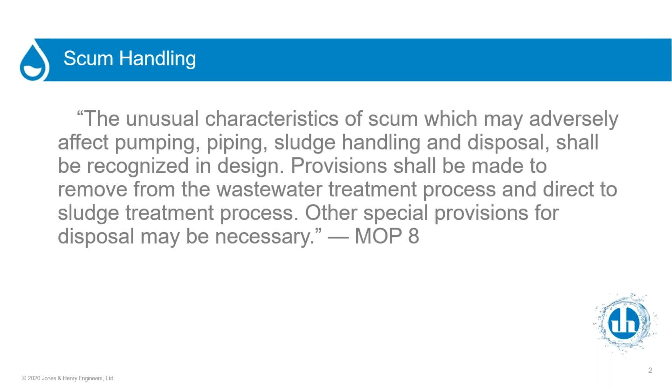So scum removal and management, why is it important? First of all, if you get a lot of it at your treatment plant, you're going to increase your organic loads going to your activated sludge system, so you have to account for those loads. Now, when I talk about increasing your organic loads, I'm usually talking about a location that has a food industry or some large scum and grease loads that will make it to the wastewater plant in order to increase your organic load.

Operational issues, odors - they increase the odors around the plant, especially in the locations where you're accumulating the scum and the grease and whatnot. So I'll call them kind of localized odors - manholes that you may be using as a scum pit or channels at the wastewater treatment plant on your primary tanks. So from an overall standpoint, there are odors being generated and they're just adding to the overall odors at the plant. Visual blight - when we talk about a wastewater plant, how critical is it or how important is it?

I really look at operators, and you guys take care of your plants very well, you like to keep them clean. This is your place to work and where you spend the majority of your time and day. So having grease balls floating around the primary tanks or inside the channels, it's just not very appealing to look at, and you don't want it to occur, or you want to get rid of them.

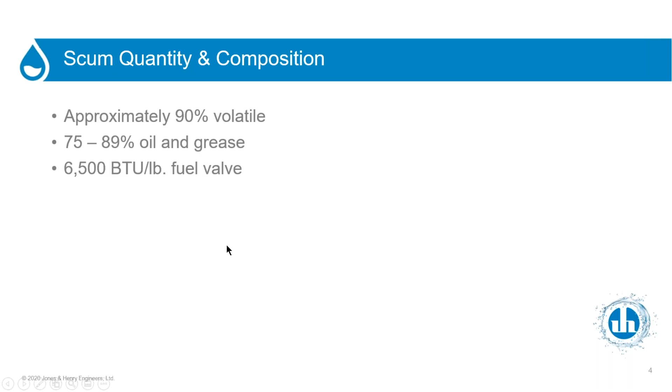We talked a little bit about quantity, again based on your industrial recycle streams at your wastewater treatment plant, and how much flow you're recycling. We tend to sometimes just pass scum around the wastewater treatment plant, sort of wanting to make it just go away. If we ignore it, it'll go away. And if we spin it around enough, keep sending it around to the headworks, eventually it'll get rid of itself - and that's just not the case.

How effective are your removal systems? When it comes to your primary tanks, your final tanks, if you have a skimmings tank of some sort, that's kind of what gets missed in the process.

The collection system can deliver big slug loads from certain areas. A lot of those slug loads typically don't make it to the wastewater treatment plant. A lot of them end up at your intermediate pump stations within the system, because that's the first place the scum, greases and oils have a chance to accumulate and float on top and not be able to get out of that pump station.

Collection systems - everybody's putting in a grease trap nowadays, and I think communities have gotten a lot better at checking grease traps. I think back in the day we were a little more lax at checking grease traps and making sure restaurants and places are cleaning out their grease traps and taking care of those. And then again, septage receiving, we kind of talked about a little bit in the last slide.

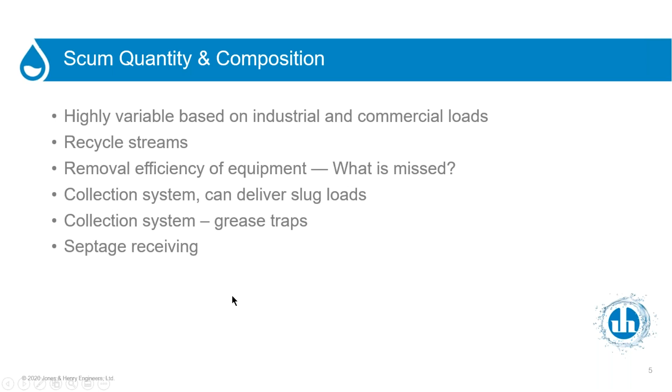The question always comes up: is this a large or small plant process as far as scum removal or separate scum removal? I'd say any plant over 10 MGD in size should certainly be looking at some form of separate scum removal, like a skimmings tank ahead of your primaries, to remove scum, greases, and oils.

As you go into medium-sized plants, say 5 MGD, you have to start asking questions. Do I want to take septage, or a lot of septage? Some plants simply don't want to take septage, so that's not a question for them. And do I have a lot of industries in town, food processors especially, that are going to give me a higher level of fats, oils, and greases? Am I willing to accept those industries?

Normal sewer permits, I think the typical number is around 100 milligrams per liter on your FOG. If I have an industry that wants to discharge 250, am I willing to take that food processor into my plant? For smaller plants, it depends a lot.

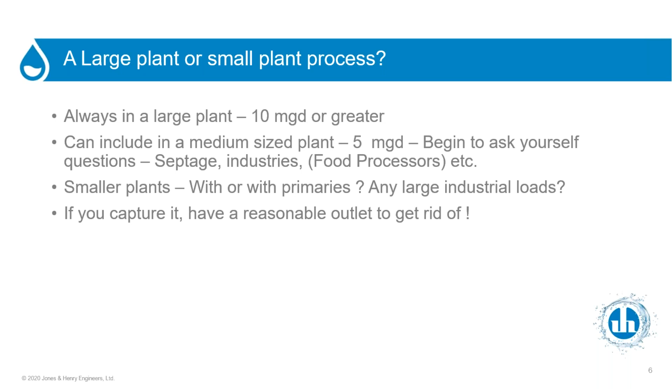One thing to always remember is that if you're going to capture it, no matter where you capture it within your scheme, you have to have a reasonable outlet to get rid of it. So once I capture it, what am I going to do with it? No matter what size plant - 10 MGD, 5, or even smaller - okay, I'm going to capture it, I know I have a problem. So now how am I going to get rid of it?

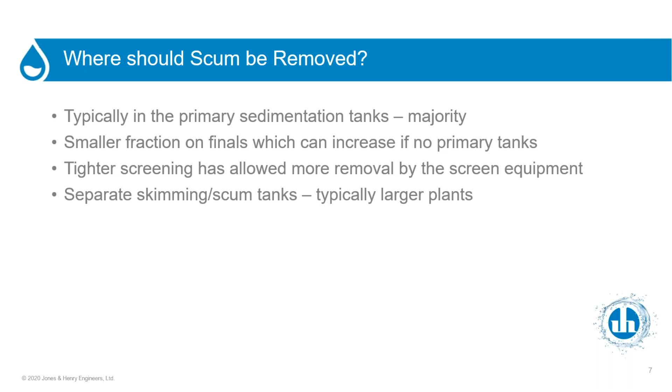The problem becomes: where is scum actually removed? And I think most of you operators out there are aware of this - it ends up at dead-end channels, especially in your primaries and your aeration channels. Some of that is avoidable, some of it's not.

As engineers, we tend to plan for the future. We want to plan for the future, so we kind of extend our channel sometimes a little past the last opening into a tank, so that we can connect onto it in the future and make building in the future a little easier. We can prevent some of that scum buildup by maybe putting in a false wall at that last opening going into a tank, so that everything coming into your channel goes into your tank.

That's really our goal, and I'll show you another slide in the future. The other place scum tends to accumulate is in influent and drain pump stations, or out in your system. You can see here, looking down on a pump station, all the scum, grease, and oils that have accumulated. Normally what happens, if it accumulates in a channel or drain pump station, you bring out the vac truck and vac it out.

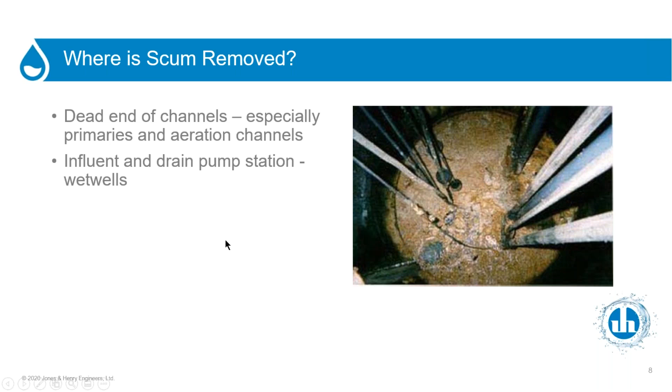So here comes the poll question. I'll let Sarah do this, but what's the chief component of scum? Solids, rags, oils and grease, none of the above, or all of the above. So let's sit here and wait a little bit for your results.

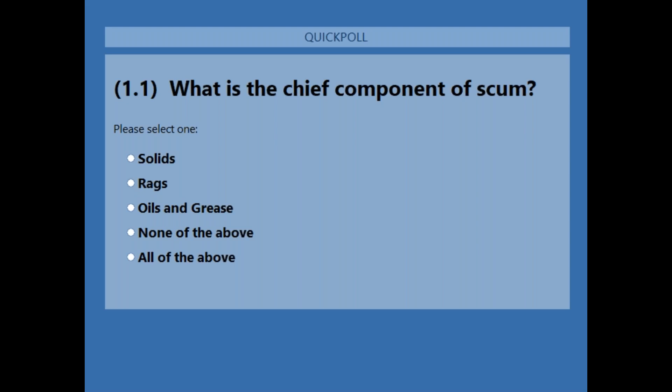Okay, we have about 70 to 75% voted now, with about 10 seconds left. Okay, go ahead and close it. All right, it looks like 79% of people said oils and grease, and 21% said all of the above.

So I would say we're in the right spot. I would accept either answer, either C or E. It's kind of a trick question, because you're going to have solids and rags in there too. So both answers are good.

So we'll keep moving along. Obviously, the trick side of the question was that you guys have dealt with it before, so you know that solids and rags and everything seem to come in with the septage loads, or along with your greases and oils.

So let's start talking about scum removal mechanisms. In primary tanks, if you have rectangular primary tanks, normally you have a full-length skimming tipping trough down at the end of the tank. It can be manual, or most of them I see are manual. I have seen automated ones, normally in larger plants where they have many primary tanks. But the manual ones work just as well as the automated ones. You roll the trough down to take in the scum, greases, and oils on top of the tank, and it either goes by gravity to a pump station somewhere, or sometimes it's directly pumped off of each tank.

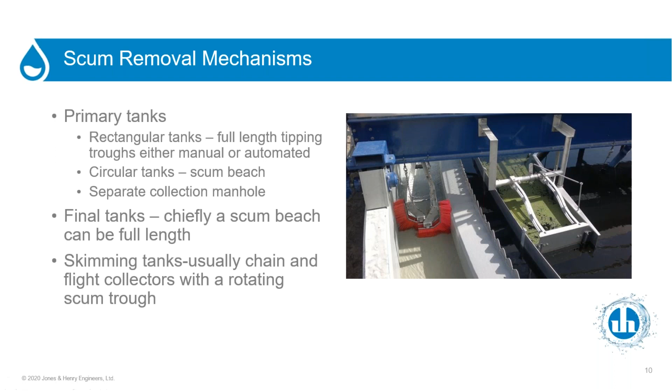Scum beach and troughs - when we talk about them, here's a full-length trough.

Typically, and you can see this one, it's kind of an odd looking picture off to the side, but you can see the walkway that's next to it. Really, you should have access to that scum trough or scum beach from the walkway.

So you can flush it out and hose it off. It's important to have a yard hydrant near your clarifier or primary tank so you can flush it out. In fact, you can see in this particular one some of the scum blocking the openings into that trough. All the trough systems have some form of automatic flushing valves on them, and I would say they all fail.

So no matter what kind of toilet valve you have on the end of your flushing trough, sooner or later it's going to plug, get something in it, and leave itself open, so you're always flushing water into your trough and putting more water into your plant drainage system. On final clarifiers, they always seem to grow a little algae, which eventually holds them open, so they'll be flushing constantly as well. That's why I said put a valve on the discharge, or on the pipe off the scum beach, so you can get in there and fix them, because you're going to have to clean them off every once in a while.

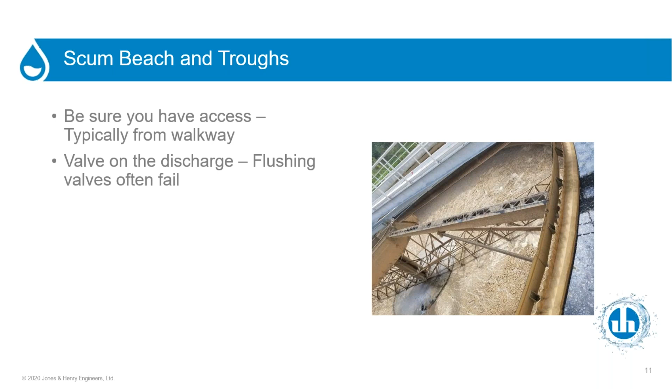So now we've captured it, and we need to pump this stuff to our scum treatment or whatever form of treatment we're using. Most often I see a chopper pump used. There are a lot of chopper pump manufacturers, but typically the word chopper pump is associated with a Vaughan chopper pump. It's got a little chopper nozzle or chopper blade on the front, and an impeller, and they work really well. They'll chop up the materials in there, because like you guys said in the poll question, you do get other things in there, solids, plastics, and rags. So chopping them up and moving them along is important.

Recessed impeller pumps, and Wemco is a traditional trade name you see, though there are various manufacturers. The idea of a recessed impeller pump is it has a big free passage of solids, shown in green in the middle of the page, with the impeller outside the flow path, just generating energy to move the solids through the casing and out of the pump.

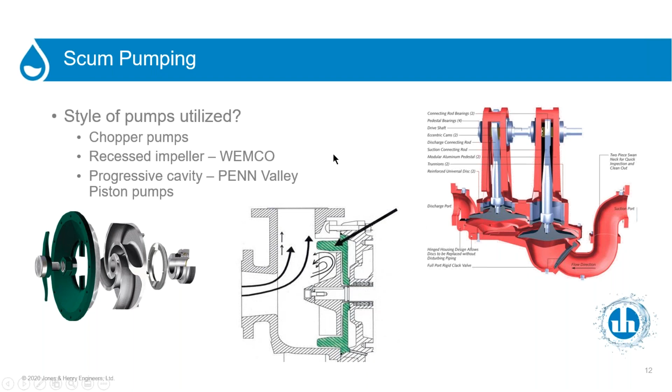As far as our scum transportation lines, now we're pumping it, now we got to move it. If you're moving it by gravity, be sure to slope the bottom of a tank or the manhole to make sure we're moving it through, putting a nice slope on that manhole with benches in there so we can move it right on through.

When we're talking about wet wells and pumping, you could consider mixing the contents, and I'll talk a bit later on how Lima mixes their contents within their scum wells. The reason is to homogenize the material. If you can get it homogenized, you have a better chance of bringing your level down lower in the pump station and getting those materials out. People will lower the bottom float and try to suck that thing all the way out, but it's really hard to do that when you have a lot of grease and scum on top. But if it's all mixed up, you've got a much better chance of lowering that bottom float on a submersible station and sucking that stuff out when you're throwing some water in that station.

In extreme cases, you might flush connections or pig stations. It might be more of an industrial process where they're handling a lot of greases and oils, so they put a separate pig in to pig out the lines they're using for transport.

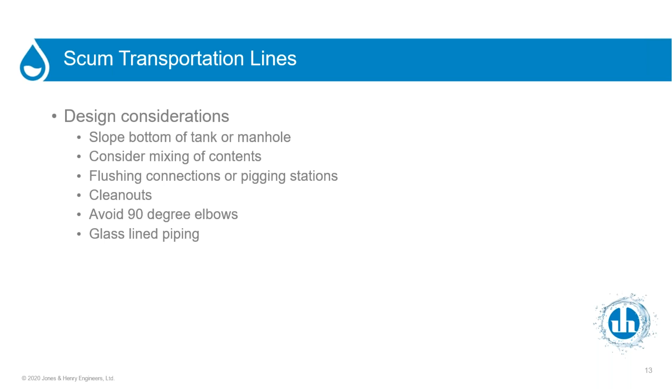So as we talk about channels, we talked a little earlier about how they accumulate in those dead end corners. So, no dead end corners - make that last opening of the tank flow into your particular primary tank, usually where we see those dead end corners.

One really important thing that sometimes gets overlooked: on the tank openings, we always put a slide gate there to be able to close off the tank openings. Sometimes we just don't get that slide gate up far enough to allow the opening to be free and clear. And if you don't allow that opening to be free and clear, then that grease and oil and scum that's supposed to be taken out in the primary tanks never makes it into the primary tanks.

It's just sitting in that channel ahead of the primaries and accumulating - that's all it does. And you guys come out and suck that channel out every 3 months, maybe 6, or yearly, with your Vactor truck. But if that gate would go all the way to the top, it would go to your removal mechanism in the tank and allow that removal mechanism to take out the scum.

Fillets in the corners - so if you have some corners, you don't get stuff accumulating in them. That's where grease balls like to form, and they just kind of spin around forever in the corner, growing and growing.

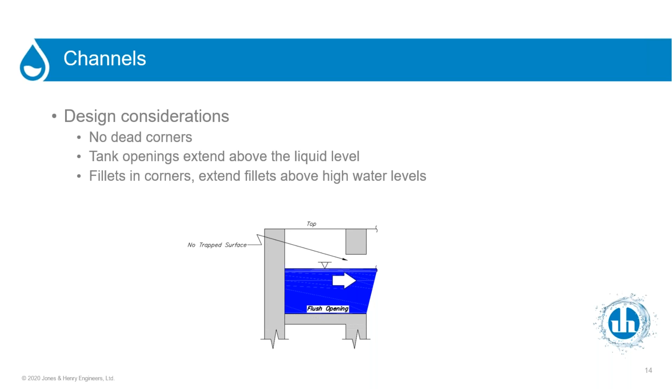Fillets in those corners keep the liquid moving, and then extend them above the high water level. Sometimes we don't get them up high enough and stuff will just accumulate on top of the fillet. But if we get it high enough, usually to the top of the tank wall, nothing will accumulate on top of that fillet. So just a couple ways to think about design considerations on channels.

We're going to move now into scum treatment - what do we do now? We talked about it, we've captured it, and now we've got to treat scum. We've got to do something with it now that we've captured it, because if you're going to catch it, you want to do something with it.

So this is a real simple concentrator tank. They can either be stainless steel or carbon steel - either way works, but we've gone a lot to stainless steel these days, so that would probably be my choice.

There's an option in these style of skimming tanks for a variable skimmer timer and adjustable overflow weirs. That mechanism that's kind of going around in the tank to skim the grease and oil off the top - you can variable speed drive it depending on the loads that you have.

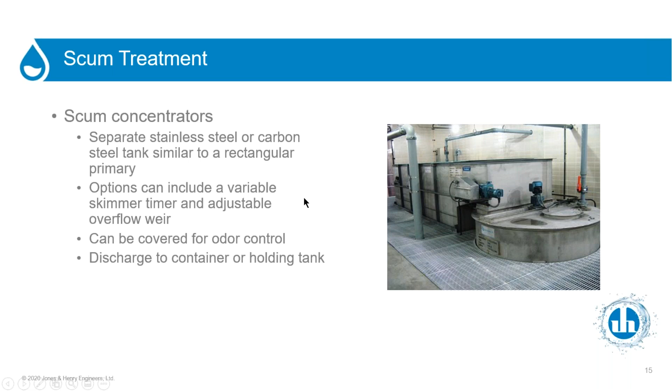Normally, a lot of times they're getting to be covered nowadays, or at least have covers with hinges on them so you can see what's going on inside the tank. They often discharge directly into a container, or sometimes they discharge into another smaller tank, like this particular one. You can see that smaller tank has a mixer on it, which tries to homogenize the grease, oil, and scum as well.

So that's this heated batch tank. I don't know how well you can see the photo, but if you look in the upper left-hand part, you can kind of see a skimmings tank discharging into this homogenized batch tank. There's a mixer on top, and this tank has a heated jacket.

What we're trying to do is keep everything fluidized well, heat it so it can further reduce and homogenize itself, put a mixer in there so you can get it all mixed up, and then pump it to where you need to, either an incinerator or anaerobic digester.

The heat on the jacket can come from your incinerator or your anaerobic digester. So you have a low temperature jacket on there just to keep everything homogenized and nice and liquid.

You've pulled it off now with the skimmings tank, and now you can send it to your digester. The digestion or breakdown process has already started, so normally you don't have those bad effects of sending a big slug load of material to a digester, and you can get that heating value from the scum for your CHP process if you happen to have one at your wastewater plant.

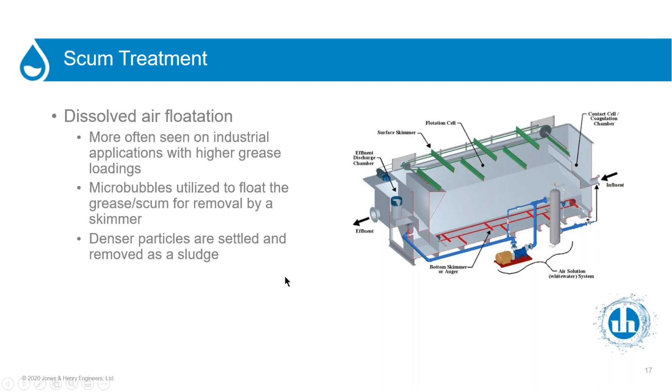You also get some denser particles that are going to settle down at the bottom, so you'll have a bottom skimmer and some way to remove the sludge from the bottom of the tank. Here they'd call that the underflow, and you'd have an overflow at the top to take care of your greases and oils as well.

I've seen this at a few plants, mostly smaller plants. They seem to work fairly well. It's called a scum screen.

They're externally fed, normally pretty small, with a tight weave on these screens, and they can discharge the scum straight into a dumpster like you see here. I want to say that's a picture of Englewood, Dayton, Ohio, but I'm not absolutely certain.

They have a spray wash to help the scum screen prevent clogging. They work fairly well, the ones I've seen and talked to people at smaller plants about, and I don't hear a lot of complaints. But on the other hand, I don't see a lot of them in service either, so probably where they work well, the operators really like them.

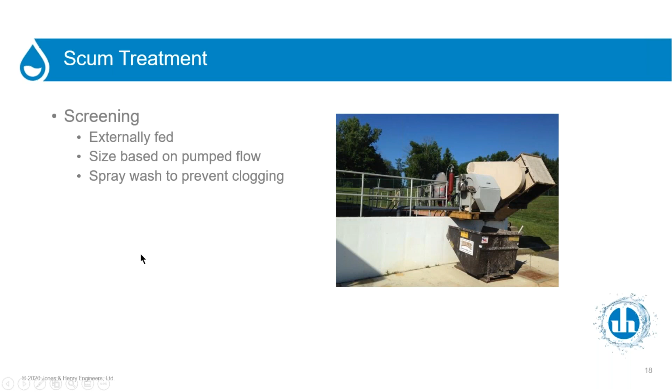So here's a little quick video of that scum screen. You can see it's a really tight wedge wire mesh.

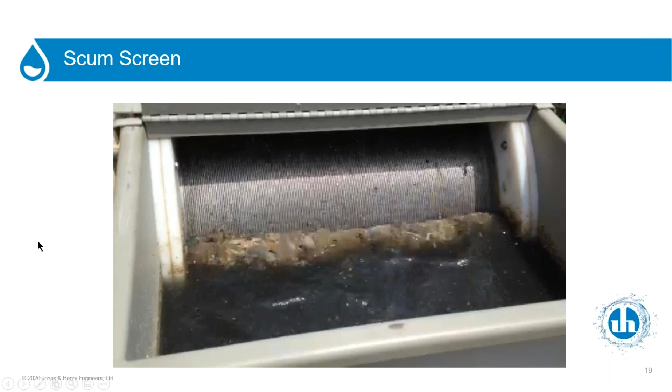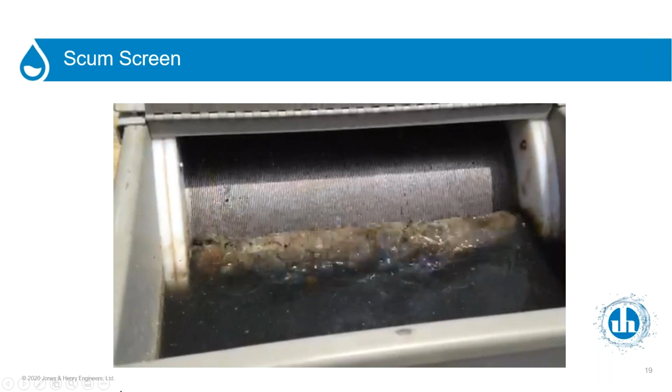One more time through the video. On the scum screen, that material will collect and normally just push out over the top of a weir or get knocked off with a wiping blade.

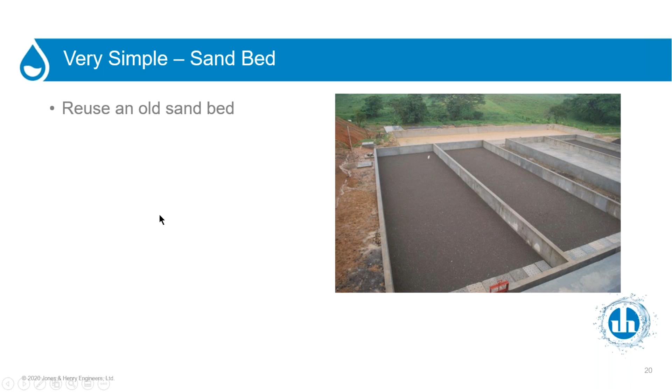If you take your scum line and dump it directly to your sand drying bed, it gives a place for the scum to drain. This one's got a picture of simply just sludge on it, but they work really well. They give a chance for it to drain out, and then you just come scoop it up with your Bobcat, throw it in the dumpster, and take it to the landfill. So it's usually pretty simple, but it works well.

Here's poll question number 2. Which of the following forms is not a form of scum treatment? A screen, DAF, a belt press, or a concentrator? I'll let you guys answer the poll question here.

And Dan, while we're waiting for folks to answer that question, I've got a couple questions here for you. The first is, are there items that you should avoid when handling scum?

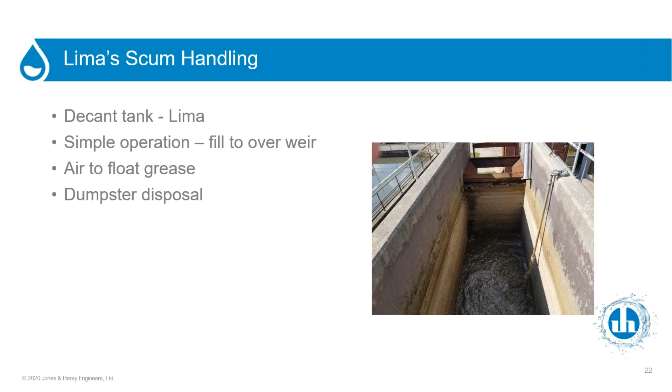Each, I believe, two tanks feed one of two separate wet wells, which has two Hayward Gordon chopper pumps in this dry well configuration. Could be just about anybody's pumps, but a couple of things I like here in this particular layout: you can see it has a very short suction line, so that since you're pumping greases, oils, and scum, you don't want those lines to build up or be very long. It makes it easy on the system. There's a valve right there and a water feed line, so we can easily flush or back-flush that suction line out in case it gets plugged.

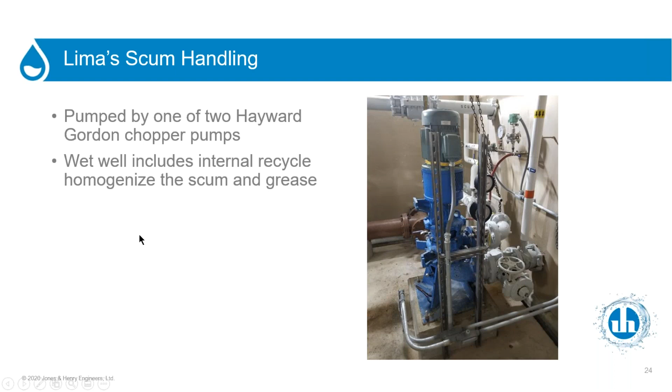This particular well does have a homogenizing system to try to homogenize the scum and grease within the wet well. And if you're familiar with Flygt pumps, they started this system that has a nozzle that allows the discharge so that the pump suction is here.

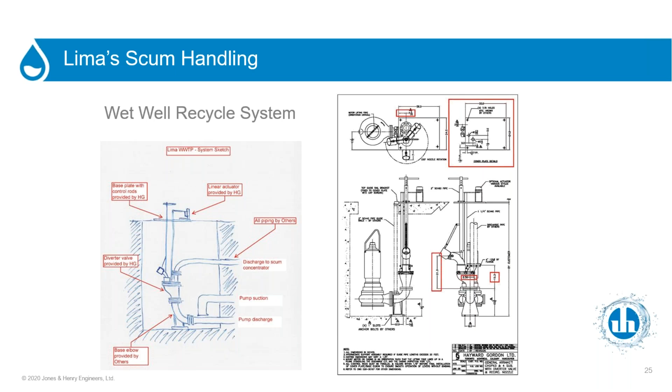I don't know if you can see my mouse or not. We have the pump discharge, and a nozzle linear actuator up here that changes position to mix up the materials within the well, homogenizing them while you're pumping it down, giving you a chance to get the well completely cleaned out. It's a pretty simple system, and it is manual. That was a selection versus trying to put some kind of mixer in there instead, or using air to mix it up, but air quite often just gets everything to float to the top. So this system was put in to try to mix it up so we could pump it out.

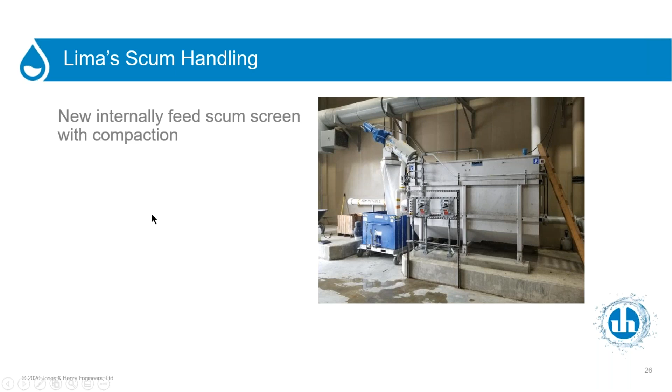So those pumps feed a new internally fed scum screen in a tank. It's 12:56, so I'll try to keep it moving along here. It has a compactor on the end there, and you can see the bag—anything this scum screen takes out goes into the baggie. That way you can keep the odors, flies, and vermin away from the scum. That internally fed scum screen is basically a basket screen, like a lot of you at little plants already have, that's put into a tank. So what are some of the design details there?

It's all 304 stainless steel construction—a tank-mounted screen, shafted screw on a 35-degree incline. It has a very tight wedge wire, 0.5 millimeter, and a pretty significant spraying system. Obviously, when you're handling greases, oils, and scum, you want to be able to spray that screen off so you don't get plugging. It has a closed discharge chute and a bagging attachment, plus a booster pump included to get you high pressure.

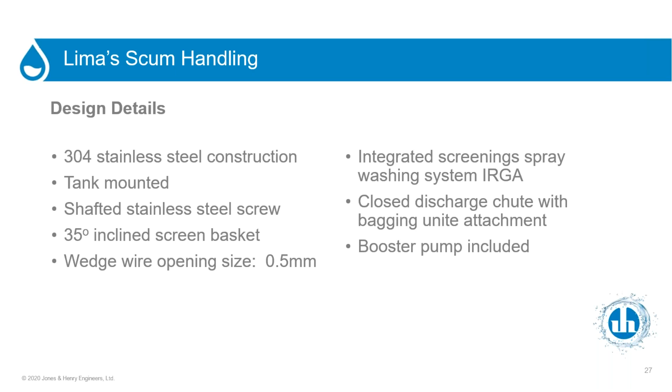One thing about the bagging attachment—normally on a standard wastewater screen, same type of screen, I get crazy about the bagging attachments because sometimes you can't see what's in the bag, and when you try to move it around the dumpster, you could get cut or poked by something inside. Here, on a more specific system for scum, I can see it being an advantage for keeping down odors and everything else. So there it is.

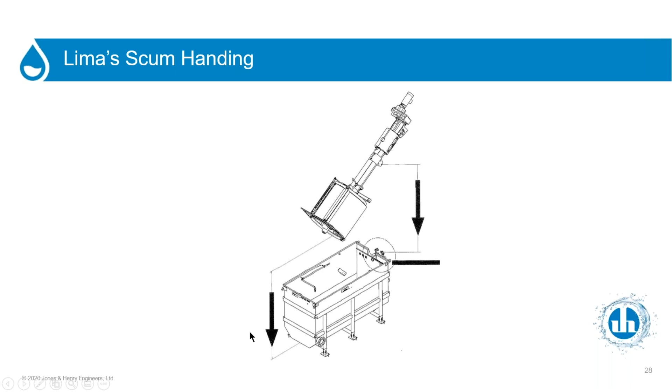There's your simple basket screen that's put into the tank. We pump into the tank and collect the scum, grease, and oils, pushing it up the transport screw into the compaction zone, along with any other materials that happen to be in there. Again, there are three high pressure washing systems on this machine with a booster pump as well—I believe it boosts up to about 100 or 120 PSI. A normal basket screen might only see 60 PSI, which is probably adequate for a normal wastewater basket screen. But here, when we're talking scum, greases, and oils, we wash it with much higher pressure.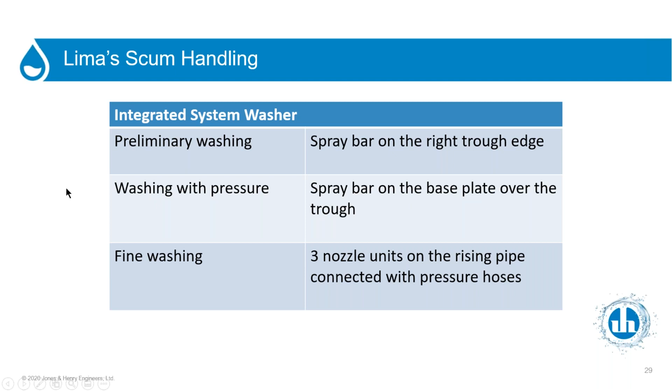So finally, poll question 3, before we talk a little about how Lima's doing. What's the most critical consideration when handling scum? That it floats and settles, that it'll stick to anything, that it will contain plastics and foreign materials, or all of the above.

Okay, Dan, I think we've got time for another question. Is it possible to have no scum handling facilities? Sure, it's possible—if you don't have any primary tanks. Like I said earlier, we do a lot of treatment plants now without primary tanks. So with aerobic digestion, you'll go straight through a screen, and the screen will pick up some of your scum straight into an orbital or oxidation ditch, or even an SBR, and then off to final clarifiers that only have a scum beach. Quite frankly, we'll chase that right back to the head of the plant and hope it comes out. Does it come out? Some does. Does it want to accumulate somewhere? It might—you'll just end up finding where it accumulates.

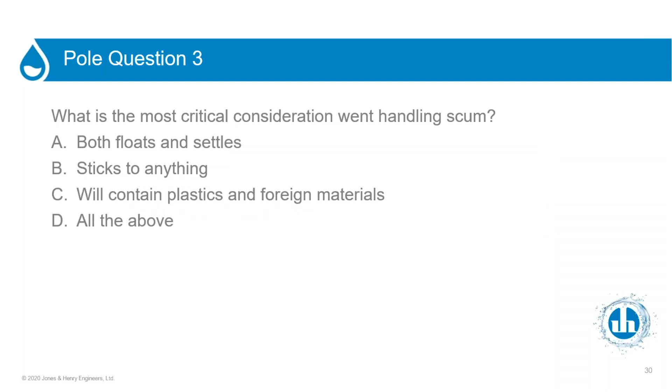So I can see I'm getting close to the end of my time here. So how's Lima doing? That's always the question. You go through a design and you want to know how it works.

They had to relocate the sonic level detector within the unit. It was underneath the cover, and due to all that high pressure washing, it was taking its toll - getting splashed on and material was getting stuck to it. So they were having to open it up and clean it. What they've done is cut a hole in the top and moved the sonic level detector so they can get at it more easily, putting it above the cover, or right at the level of the cover.

Something we talked about before, they've had it plugged from certain food waste and grease. Where they've taken in a load full of a lot of grease and oils, it has plugged it. You've got to be careful of your loads. Sometimes you should have a mix, but when you take a load full of really bad stuff, bad things can happen.

If you've ever worked - I worked in a restaurant a long time ago, and it had grease fryers. Somebody left the nozzle at the bottom of the fryer open one time, so when the grease melted, it ended up on the floor. There's not a whole lot you can do about it right away, other than wait till it congeals and clean it up with a spatula. So cleanup is difficult when you get big loads of grease anywhere.

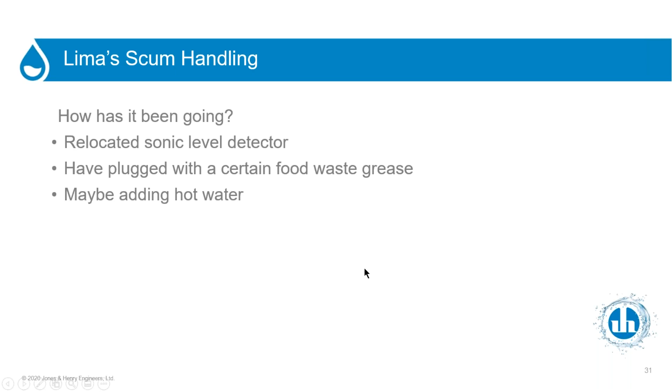It was talked about, and maybe they were only going to do it in one of the spray bars. So other than that one-time plugging up, and the moving of the level detector, it's worked really well. So with that, I'll open it up to questions.

Okay, thanks Dan. A couple of questions here. So over time, has the need for scum handling become greater or lesser at wastewater treatment plants? That's a good question. It's kind of dependent upon the neighborhood, so to speak. A lot of departments have told me if I have a neighborhood with a lot of apartments, the scum and grease loads can be more, and when I have more homes, it could be less. But in general nowadays we stuff everything down the garbage disposal, including whatever grease has done. So I would say probably it might be a little less because we don't like to use greases and oils as much anymore. But on the other hand, everything goes down the garbage disposal - my mom used to collect the grease in a can and throw it away, and I don't think a lot of people do that very often. So we'll call it: it hasn't gone up and down.

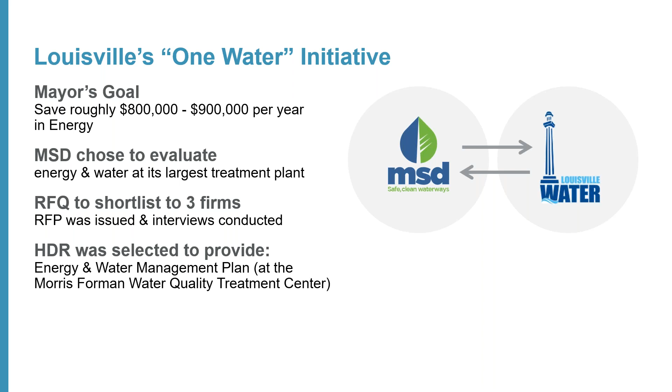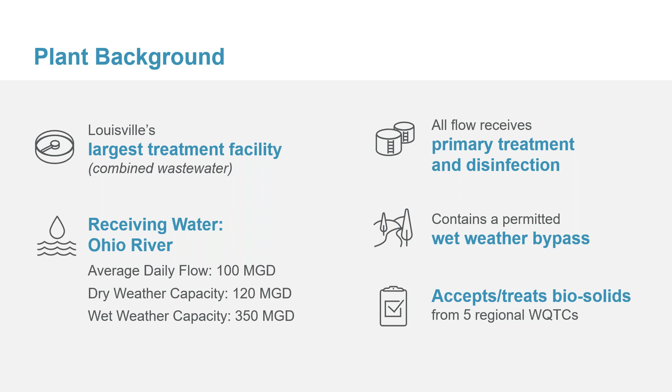It sits right on the Ohio River. A little bit of background on it: as I mentioned, it's Louisville's largest facility, and it treats combined flows. Average daily flow is 100 MGD, dry weather capacity is 120, and under very high flow conditions, wet weather capacity is 350. They basically treat all flow with primary and disinfection at 350, and up to about 250 on the biological side. They have a permitted wet weather bypass, and they actually accept and treat biosolids from 5 other regional facilities that MSD owns and operates.

Their liquid stream process is pretty typical, except for 2 things. They had biofilters, which they decided to keep in place when they added a high purity oxygen system as part of one of their expansions, perhaps 20-25 years or so ago. So they really have 2 different types of biological treatment, and we're going to talk about that a little bit more as we move through the presentation. And because they're on the river, there are times when the river stage is up when they have to pump their final effluent.

On the solid stream side, the previous presenter talked about dissolved air flotation. They have DAFs, they have anaerobic digesters. At the time of the study they had centrifuges, drum dryers, thermal oxidizers, and they produced a product called Louisville Green, a fertilizer blend similar to Milorganite. Since this project was completed, MSD decided to move forward with a thermal hydrolysis process, Cambi being one of the manufacturers, and remove the digesters and dryers.

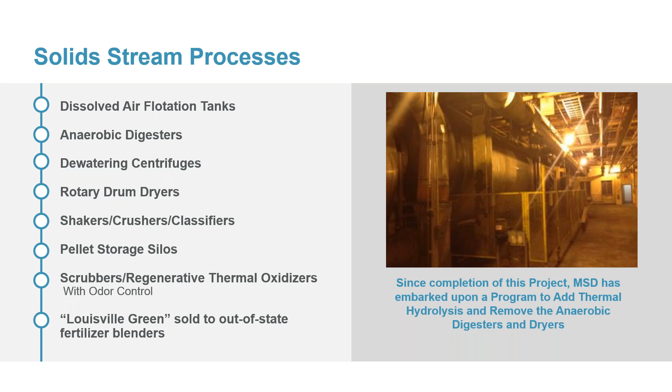So we're going to do our first polling question right now: what was the primary driver for Louisville MSD's embarking on a water and energy management study? Was it to make the utility more resilient, to comply with the mayor's initiative, because they had some money left over and it seemed like a good idea at the time, or because it was something the plant staff wanted to try?

While we're having participants answer, I have a question for you, Rich. Are these energy and water management plans scalable for different size facilities? They very much are, and fit for purpose. I've seen some utilities spend a few hundred thousand dollars to do a very detailed study with concept designs of the recommendations. We've also done these for utilities who want to spend less than $100,000 and get a prioritized list of things to do, then develop them themselves or put out separate projects to implement them. So yes, they are very much scalable.

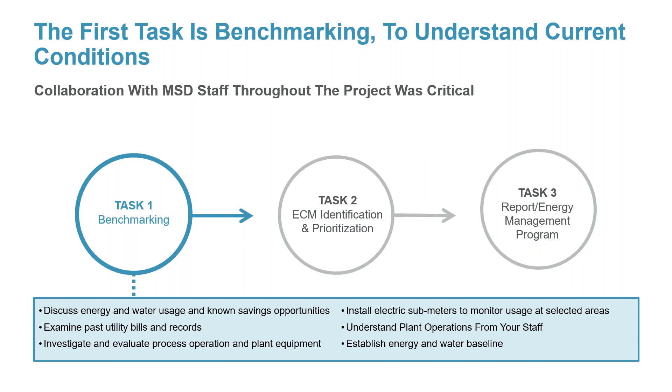This is from the WEF Energy Conservation in Water and Wastewater Manual of Practice number 32, for a typical advanced wastewater treatment plant. It shows that aeration consumes about 54% of the energy, which is pretty common—aeration has big blowers and big motors. In their typical plant, they had aerobic digestion.

That was another use as well, in wastewater pumping. So I provide this just for your information.

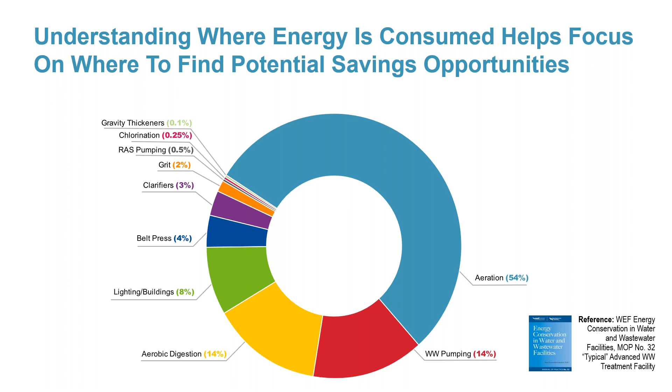Really, what we did was we developed one of those for this plant, and that's typically what we will do, is to be able to look at where energy is used and water is consumed at the facilities that we're evaluating.

So when we started this, and this study was done in 2013, 2014, basically they consumed about 75 million kilowatt hours per year. Their electrical bill was about $4.7 million a year. Natural gas was about $1.5 million a year. Potable water was about 660,000 a year. So this was really the starting point here.

And yeah, even though Louisville Water and MSD are both city enterprises, MSD does have to pay a water bill to Louisville Water. So their total electrical, water, and gas cost was about $6.8 million a year.

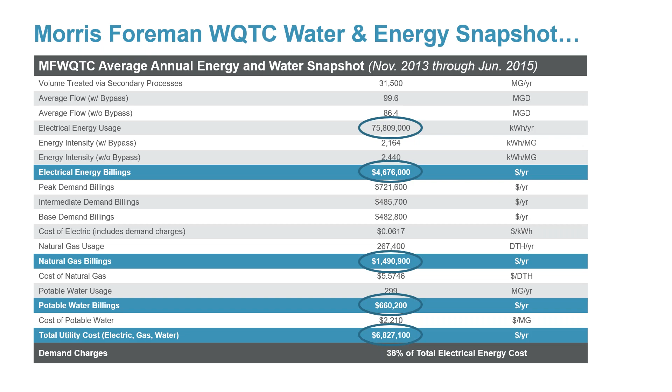One of the things that we typically do is develop a chart such as this, and what this chart basically shows across the top in the columns is month per year, and then down the rows is hours per day. And as we know, electric utilities have variable charges depending on time of day and season of the year. So we developed this one for Louisville MSD, and you can see here there was not a lot of variability in their case. It ranged from about 4.2 up to 5.75 cents a kilowatt hour.

Whereas for other utilities, this is a tool in the toolbox to say, can we defer operation of something? For example, can we defer washing filters until night as opposed to during the middle of the day on a hot summer day? Doesn't make a whole lot of difference here.

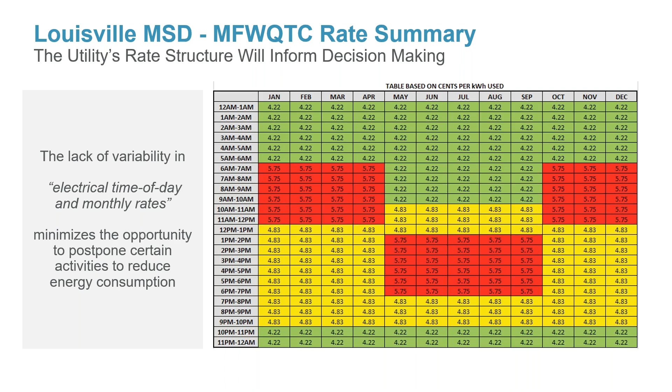Just by comparison, I led an energy audit for the city of Atlanta about 15 years ago now, and you can see here that there was great variability, from anywhere from about 3.5 cents a kilowatt hour up to 16 cents a kilowatt hour in the middle of the day on a hot August. So here it did make sense to take a look at deferring things.

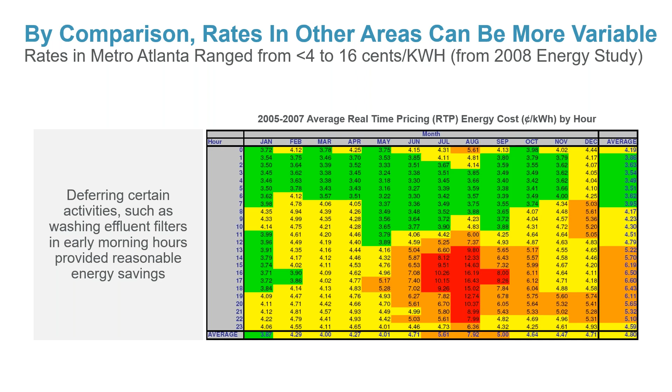For example, they have total nitrogen limits, and by doing nothing more than reprogramming their PLCs to wash their filters in the early morning hours as opposed to during the day, they would save about $50,000 a year. So anyway, that's an important thing to take a look at for any one of these audits.

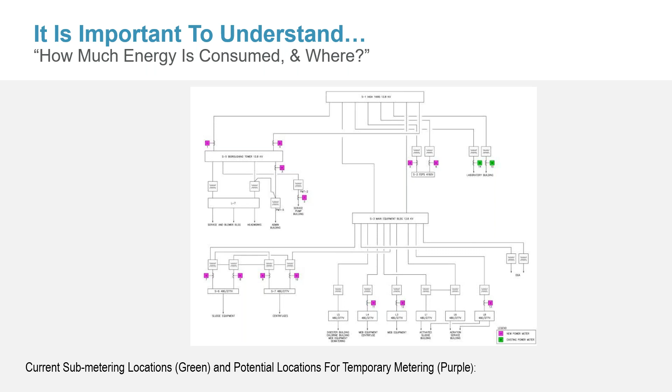It's also important to understand, as I mentioned, not only how much energy is consumed, but where. And what you see here is a one-line diagram for Louisville MSD's plant. A one-line diagram is an electrical schematic, basically, that shows the utility service. The only thing really to note off of this is the two green boxes in the upper right - that was where they had their submeters. So what we did was we installed submeters at a number of other locations as shown in purple there, because what we really wanted to do was get a better understanding of where and how much energy is being used by process, to get real data to be able to analyze.

So what we found, and this is presented a little bit differently from the circular graph that I showed you before - if you look to the left, the percentage of the total plant electrical load is the height of the columns, and the process areas are delineated by each one of the columns. We had to estimate some of the loads, like for their oxygen gas generation system.

But by and large, you can see here that about 76% of their total energy was consumed in 5 areas, basically: the bio-roughing filter and trickling filter influent pump station that I mentioned, the oxygen batteries where they had their pure ox tanks with mixers on top, the sludge dryers and process water pumps was another process area, dewatering centrifuges was another, and then the oxygen, pure ox generation was the other one.

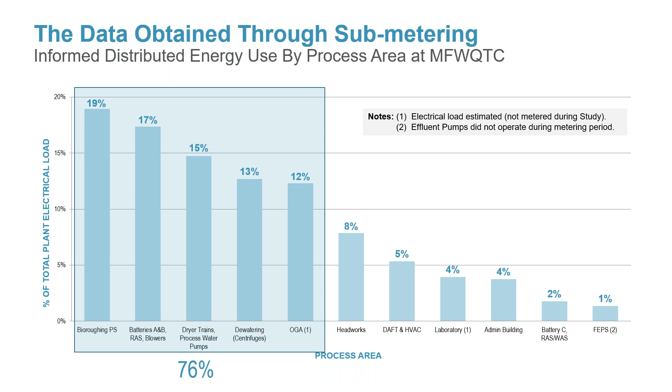So we're now going to move into our second polling question, and that is: what is the primary task when starting the development of an energy and water saving study? Is it to hold a kickoff meeting? Is it to prepare the first invoice? Is it to perform benchmarking of existing operations? Or is it to have a team celebration?

Hey Rich, I enjoy your polling questions. I know which one I would vote for. It's probably not the right answer, though. I do have a question for you, right?

Yes. One of the questions that we've got for you: what are the primary motivators for utilities to engage in doing these energy management plans?

Good question. As we've seen with Louisville, it was politically driven, but it was embraced by management. And we're going to talk a little bit about getting operations engagement and embracement as well, because that's really where the rubber meets the road. But there's some utilities—when I did one of these for DC Water, and this was again 12, 13 years ago—they were very concerned about greenhouse gases, and they wanted to reduce their greenhouse gas footprint. Sometimes they're driven by the financial side of the utility as well, saying, look, how much money do we have to spend in order to save annual costs where it makes sense to do that, with a relatively short return period, for example. So those are the three primary ones: political, just being a good neighbor, as DC Water was, or really just looking at the financial side of it and reducing impacts to ratepayers.

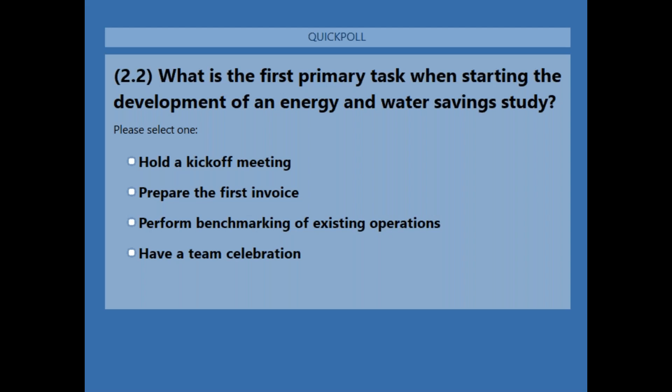And it looks like we have wrapped up our poll. Is that right, Sarah? Yes, yep, I went ahead and closed it. We had everybody answer who has been answering, so let's look at the results. So most thought it was perform benchmarking of existing operations, but then hold a kickoff meeting was also chosen as an answer.

Yep, and actually, technically, I guess the kickoff meeting would come first, but really, after you get beyond that and start moving forward, the benchmarking is the one that I had in mind on that. Team celebrations are never a bad thing either, so I'm surprised nobody picked that, but there's plenty of time to celebrate as you go through these projects and start recognizing and realizing savings.

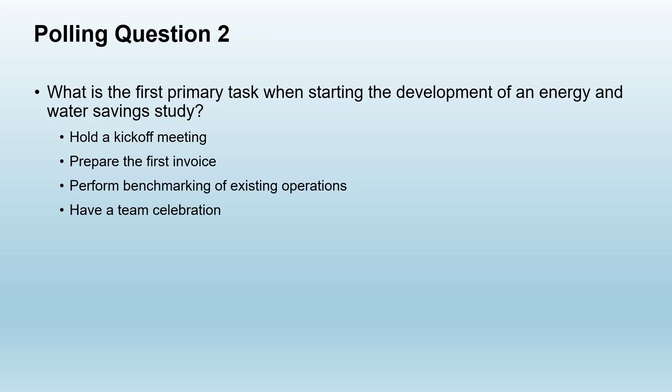So we've talked about task one. Let's talk a little bit about the next task. The next task is developing ECMs and prioritizing them. And again, remember, ECMs are energy conservation measures. So as part of this task, we identified and developed them, we assessed and prioritized them, we spent time on site. Actually, what I really prefer to do is to spend time in a conference room at the plant,

where we can develop ideas, where we can engage staff, where we can go out and look at the facilities as we come up with ideas. And what we typically like to do at the end of each day is sit down with the plant manager and/or his key staff and go through what we're coming up with and run it by them to get their thoughts on it.

One of the things I've learned in doing this is there's a lot of good ideas that plant operators have on the front lines that, for whatever reason, don't always get elevated within an organization. Part of our job is to take those, shine a light on them, and elevate them, making sure the plant staff gets the credit for that. That's hugely important. Throughout the time we spend on site, we do interviews with the staff.

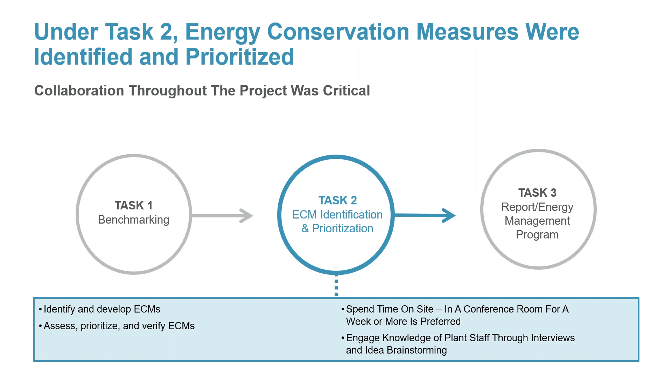And as I mentioned, we do brainstorming as well. There is a commitment, though, that we make to the plant staff because, quite frankly, it's important that we gain credibility with them, and we don't want to be viewed as somebody coming in because management wants to find things wrong with how they operate the plant. That is not what this is about. This is really about collaborating with staff to look for other opportunities to reduce energy and water use.

So as part of that, there's some things that we will do. We will review the relevant data, visit the facilities, and conduct interviews.

We've talked about soliciting ideas from staff, developing ECMs, and really presenting quick win opportunities. If we see an opportunity for savings when we're walking through the plant, we'll talk to the operators about it, so if it's something that can be done relatively easily, they can choose to implement it and start saving energy more quickly.

An example of that is walking through a pump station a few years ago. The louvers were forced open in the wintertime for the ventilation system in a building that was normally heated, so they were using heat they didn't necessarily need to use. Also, at another facility, the filters on the air intakes were clogged, so they were consuming more energy. These are things plant operators probably knew to do, but with everything else they have to handle day-to-day to keep a plant running, they just slip through the cracks. So when we find those, we bring them forward.

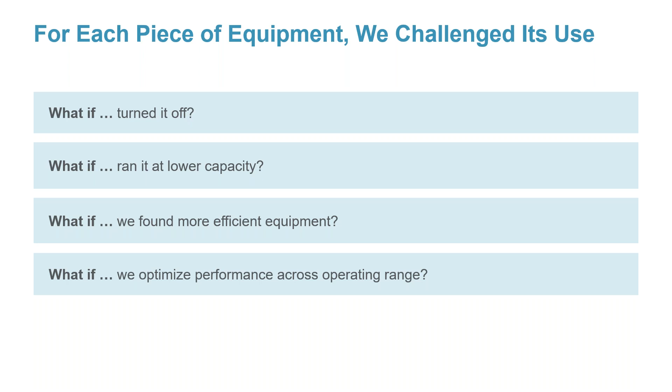For MSD, some of the key information was to develop an average electric cost, including demand charges just to keep the calculation simple, natural gas cost, and water cost. Then we met with their financial side, and there are a few different ways to measure the financial viability of the alternatives we're going to develop. One of them is a simple payback period: if you spend $5,000 today and save $1,000 a year, the payback period is 5 years.

The other one, which the financial officer for MSD chose, is to do a net present value, taking a look at what the savings would be versus what the cost would be over a select return period, which was 20 years in this case, and a user return rate, which turned out to be 5% for them. You also look at feasibility.

Coming up with ideas is one thing, but they have to be feasible and they have to be able to work. What's the level of difficulty? The level of difficulty would help determine, if they are feasible and do offer a nice savings, whether it's something the utility would handle itself, or whether you'd put it out as a separate design contract and have a consultant and contractor implement it for you.

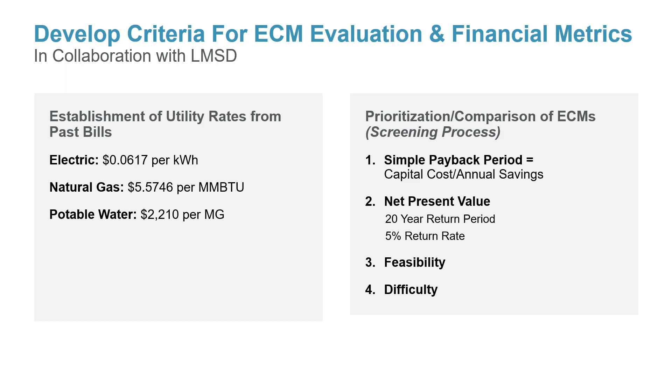As we go through that process, there are basically several categories ECMs can fall into. There are early action items that can be implemented quickly at no cost. There are maintenance-related things, preventative maintenance, for example side-by-side monitoring. At one of the large plants, they had amp meters on the motors of some 24 return activated sludge pumps, and several were way higher than the others, telling them there was a problem, so they'd go in and check the motors or windings to keep them operating reliably and efficiently.

There are also things that can be procedural or programmatic, embedded in an organization's culture, like in a specification, when does it make sense to use an energy efficient versus a premium efficiency motor?

Is there value in developing an energy dashboard through the SCADA system to be able to look at real-time data? Lastly, I alluded to capital projects, larger and more complicated projects with equipment process modifications, or even renewable energy. Some utilities, as the previous speaker talked about, use grease in their digestion process to recover more gas.

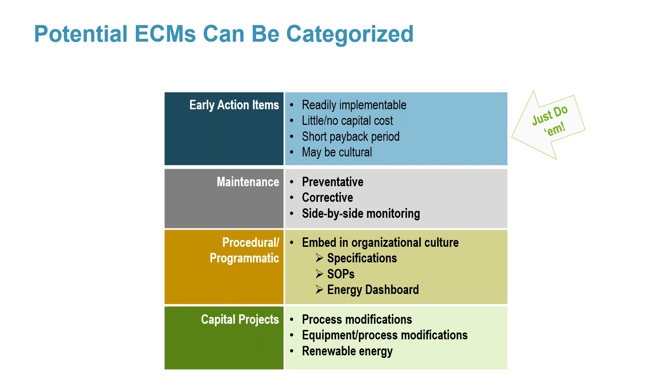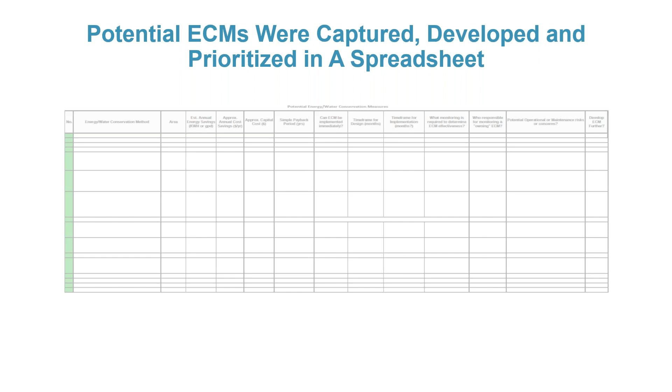To be able to generate more electricity or convert to natural gas. So as we develop all of these ECMs, we come up with a spreadsheet basically. I know you can't read this, but it has each of the measures listed with estimated savings in power, savings in cost, estimated cost to implement, etc. The key factors I've pulled out here so we can read them.

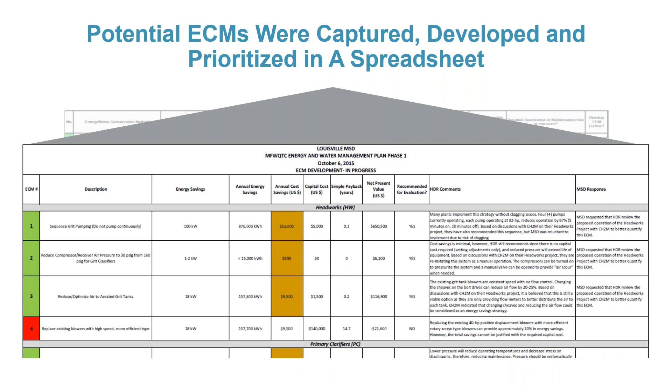The operational changes, the screwdriver changes I mentioned, or quick wins, we brought those forward as we went through. As we categorized the ECMs, there were 10 electrical, 2 natural gas related, 2 potable water related, and then a couple that we identified that really weren't part of the scope, but we did want to bring those forward to the client for them to consider.

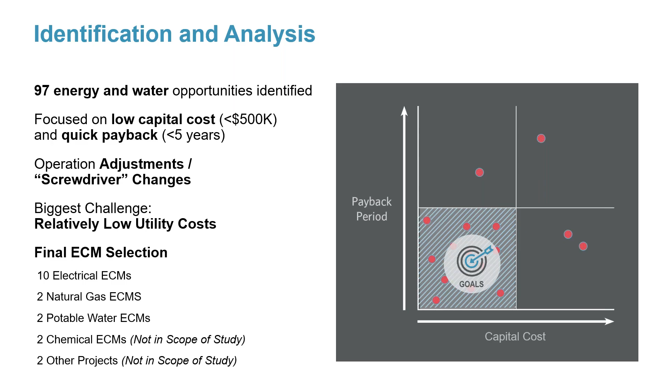So we'll dive into the details quickly since we're limited on time. The priority 1 ECMs we identified are things that could be implemented on a standalone basis. They had sludge diaphragm pumps for their primary sludge, and they were using air at a much higher pressure and then reducing it down than they needed to. So a simple adjustment on the air compressors, reducing them by about 30 to 40 pounds or so, had a very real savings.

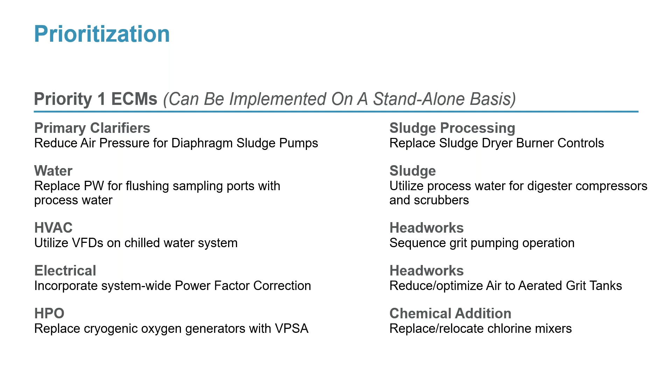We looked at system-wide power factor correction across the board. We looked at replacing, just reading a few of these, the burners on the sludge dryers. We looked at optimizing the air to the aerated grit tanks also. These were all things that could be done sort of standalone.

The priority 2 ECMs we categorized are things we said, this looks like a really good idea, but we probably ought to test it. One of them was in the final clarifiers, the channels to the finals were aerated. It appeared to us that they were being over-aerated, which not only uses electricity but also tends to break up the floc as it goes into the finals where you want it to settle. So we suggested a program to look at reducing the amount of air incrementally, looking at the impacts and finding perhaps a more efficient place to operate.

On their high purity oxygen tanks, they have vertical mixers. They're covered, they generate oxygen on site, then pump it through diffusers into these tanks. They were running all of the mixers at high speed. By looking at a process model, we said we don't think you need to do that. We think you can run some or all of the mixers at low speed and still meet your requirements. They actually did that when we were out on site, and it proved out, saving them a significant amount of money in generation as well as mixing.

Then, I mentioned they have the bio towers, or trickling filters. We said we really don't think you need to have the trickling filters and then have the pure ox system, because you can't turn the pure ox system down far enough for the benefits of knocking the BOD down in the trickling filters to really pay off, and you're pumping the flow into the bio towers all the time. So that was another one we suggested: take the bio towers out of service and watch what happens. And they did.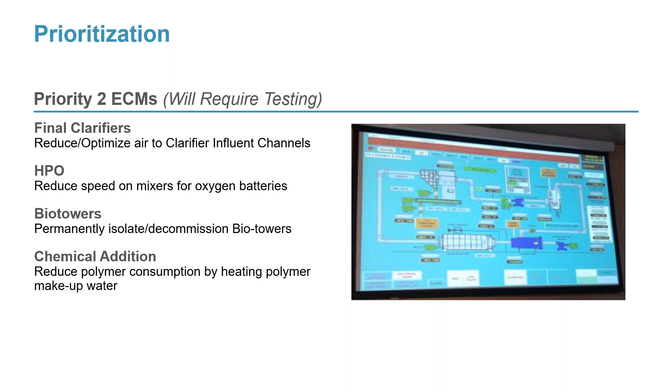Changing the operation of their HVAC and sludge boilers. Let's look at several of these in more detail, just to give you an example of what the output would look like.

The first ECM was optimizing the pure oxygen system operation and reducing the speed. We had a process model from DWG, Dan Gay and Associates. Dan is an expert in pure ox, and I've worked with him on several projects. We confirmed there were no impacts on DO. The capital cost to do this was basically nothing, and the annual savings was about $264,000 a year. They implemented this while we were on site, so it had no payback period. It really doesn't get any better than that.

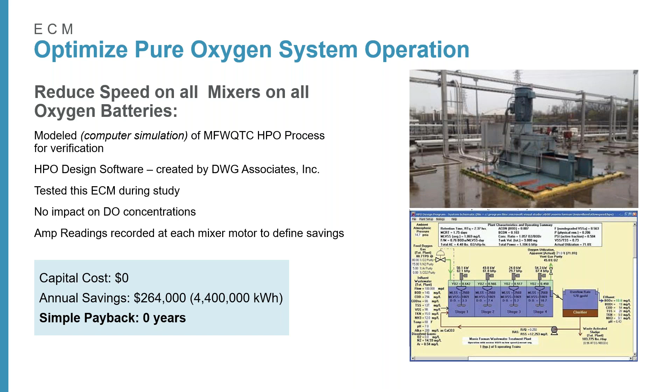Another one we looked at was reducing potable water use. We looked at putting in strainers to take plant water, or service water as some call it, and use that for process water. Of course they chlorinated that water anyway, so that was a good thing. We looked at different types of strainers and came up with a recommendation. The capital cost to put the strainers in and modify the disinfection system a bit was about $425,000, and the savings was about $280,000 a year. So it would pay itself off in a year and a half, which is good.

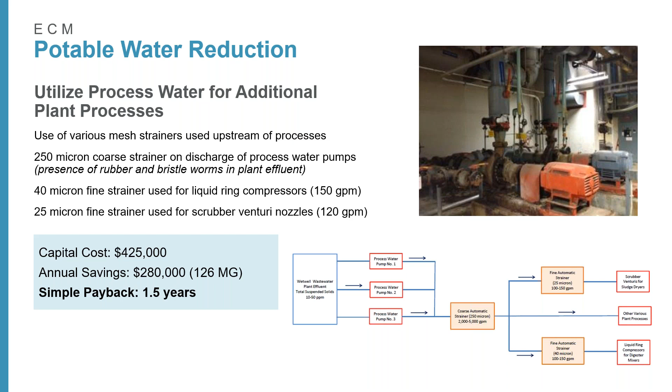We also looked at biogas storage. They flared a lot of gas. The settings on their digester pressure reducing valves could have been better optimized, and the control systems could have been better optimized on the burners. We estimated the capital cost to implement at about $60,000 and the savings at about $118,000, so this would have paid itself off after about 6 months. But as I mentioned, and maybe this study had a little to do with it, they decided to move in a completely different direction and use thermal hydrolysis for their digesters.

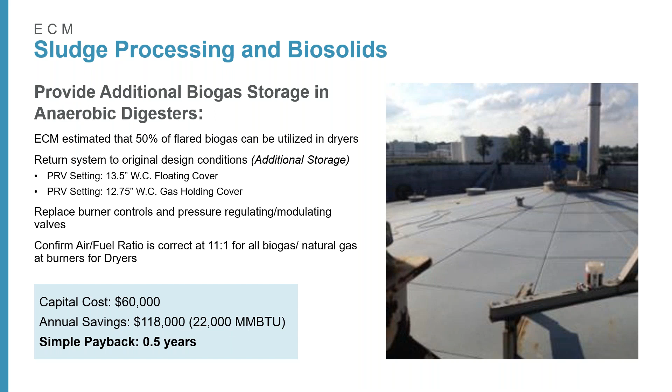The last one I'll touch on is additional data collection and real-time use monitoring. We talked about submeters and their importance, and pulling that information into the plant SCADA system. We also recommended they look at incorporating an energy dashboard so they could see what their energy usage was at any given time. They could do trending to see how they were progressing as they implemented improvements in reducing their energy footprint, and also to help them make decisions. For some equipment, not all, you could potentially defer starting it to a time that's more beneficial from a rate standpoint, though there's less impact here because of their rate structure as we discussed.

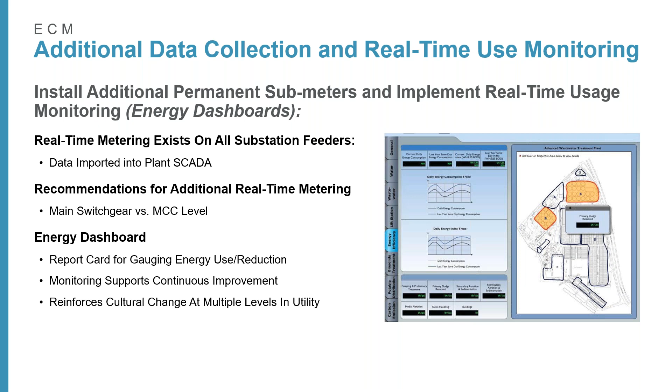So, polling question number 3: what does ECM stand for? Remember, I gave you at least 2 hints on this. No pressure.

And the potential answers are: energy conservation measure, energy continuity management, efficiency conservation measure, and enhancements to conserve money.

Rich, we do have a question: how did you heat the polymer feed water? Basically by putting in some heat tracing and insulation around it.

Another question: where else have you led energy audits at water and wastewater facilities? Sure, and I think this was part of the intro, but for Harrisburg, Pennsylvania, Capital Region Water, I led one on both the water and wastewater side. DC Water was another. City of Atlanta, Georgia, at 3 of their 4 wastewater plants. And then in Aurora, Colorado, of all places, which is actually quite a beautiful place in the foothills of the Rockies, both water and wastewater, and learned how they take water from one side of the mountains via snow capture and transfer it down to the other side. It was fascinating, certainly nothing that any of us in the Great Lakes Basin have ever had to think about. It's a whole other level of engineering, I think.

Okay, so in summary, the ECMs we identified, across the different priorities, totaled about $2 million in potential savings a year. Remember, their bill was about 6.6 million, so not quite, but almost a third.

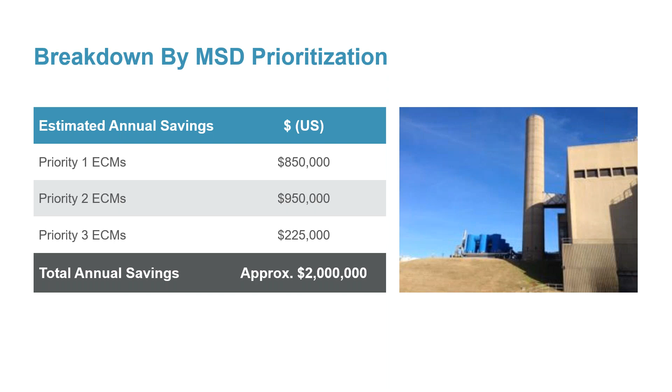And the payback period on the ECMs we recommended was about 1.2 years, or 14 months or so, which again was part of the focus, to find those that could be implemented and start saving money pretty quickly.

So, path forward. As we talk about developing a report, there are so many reports that end up sitting on a shelf collecting dust, and that's not really what any of us want. We want them to be a living document.

So as part of what we recommend, it's not only the technical side, the findings and recommendations for the ECMs, but also talking about organizational barriers and what can be done to improve the chances of successful implementation. This is just another way of presenting the steps I presented before.

The plan development was gathering information and comparing it, benchmarking it, spending time in the field, looking at key energy consumers, developing ECMs. Then really successful implementation is establishing an energy management team and encouraging a discussion of energy awareness.

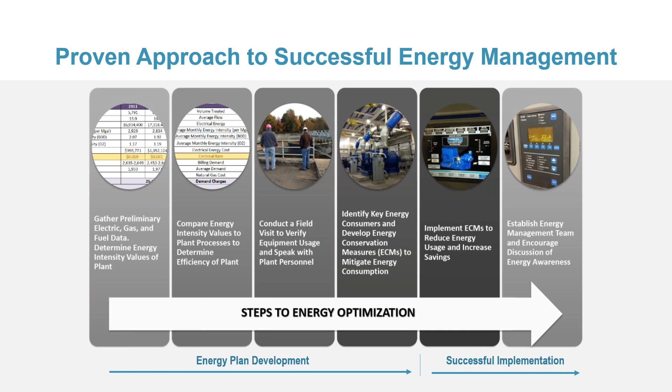So it doesn't stop with the report, it really starts with the report. It's important to remember that the study is just the beginning of the process, and it produces an energy savings plan. The savings can't really be realized until the recommendations are implemented, and implementation will not occur successfully unless the organization buys into it, from the front lines all the way up to management.

So looking at it a little differently, initiating the study and implementing the recommendations is a multi-step process that starts with the study and developing the plan. By the way, some people call these energy audits. I try to avoid the term audit. I think audit typically conjures up IRS and tax audits, income audits. Nobody likes that term. As part of the energy savings plan, we identify those early action items we talked about.

Implementing the findings in a prioritized fashion. Monitoring and verification is important also, not only to say that we think we're going to save so much energy, but to prove that we actually are.

And then continuous improvement, either refining some of the ECMs that got implemented that can be further refined, or adding to the list of priorities and saying, okay, we had 92, we've tackled the first 6, now let's go to the next 6 and then the next 6, because we know we can't implement everything at once. So we have to prioritize how we attack this.

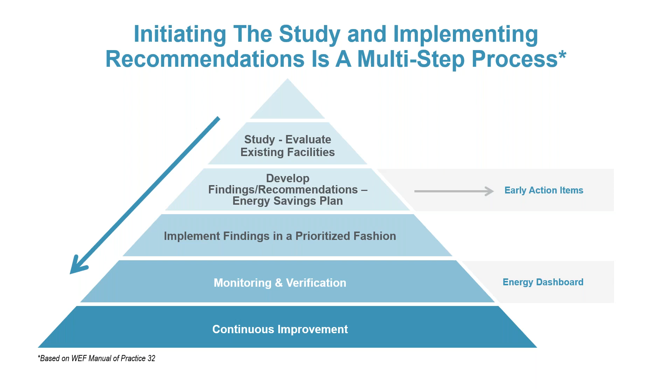And really, a successful energy program at MSD, at any utility, really integrates a number of different activities, from continuous monitoring that we talked about, after the plan's developed, to publicizing success. We've saved energy. Let's share it with our staff, the utility staff. Let's share it with our stakeholders. And you need a champion for the energy savings team.

I like to call it the energy czar. Somebody who's going to say, we need to keep energy in the forefront of what we do. Just like we always look at keeping operability in the forefront, we need to keep energy in the forefront and really develop an energy culture in an organization. Every one of the organizations I've done these studies for has had an energy czar, if you will, that's driven that program.

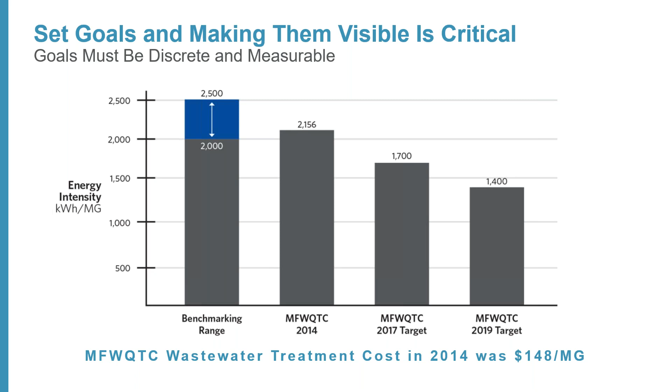We talked a little bit about benchmarking, and I didn't get into this much, but when we started this, for a plant like MSD's plant, the typical range is about 2,000 to 2,500 for a plant of their size and complexity. When we started the study in 2014, they were within that range, about 2,156 kilowatt hours consumed per MG. And they set a goal that by 2019, they want to get down to 1,400. So setting a goal is also an important part of this, and then measuring progress against that goal and communicating it is also important as we think about organizational and cultural changes and awareness.

So the last graph that I have is a little complicated, so let me explain it. It starts at the left with the legacy facilities, what you have right now, what the current O&M practices are, and what you're paying for energy. Then if you jump to the right, where do you want to be? Where do you want to be from an O&M practices standpoint and an optimized facility standpoint? And the thing that gets you there is implementing the results of the savings plan.

It's developing standard operating procedures to move you along the way. And these are things like, when do we use energy efficient motors? When do we use premium efficiency motors? It probably doesn't make sense to use premium efficient motors all the time, but it doesn't make sense not to use them at all either. So an SOP would define that.

And then implementing the capital projects that would come out of the study, in addition to the other recommendations in the study. And all of those things, and the organization embracing the change, will get you to the fact where you'll have realized success in an energy program.